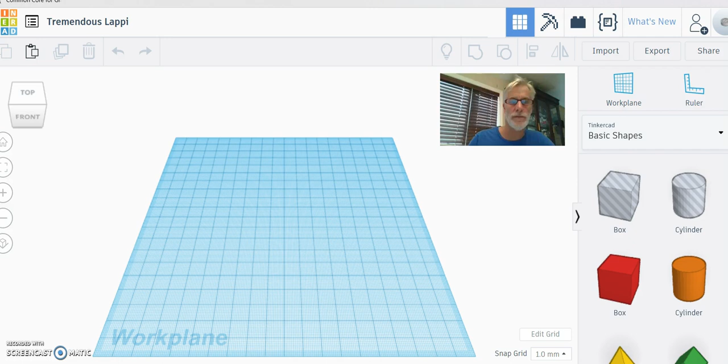Okay, so we're going to get started. As you guys know by now, the first thing I do when making a project in Tinkercad is give it a name that helps me know what it is. So today we're going to do part one of a two-part video designing a medal that you're going to wear around your neck, some sort of medal to represent that we are the Spurgeon Cougars. This part we're all going to do together, and in the second video I'm going to show you how to customize it and make it your own.

So let's name this medal, underscore and your name. I put name because you're going to put your name there. Let's do first name, last initial, that should be fine.

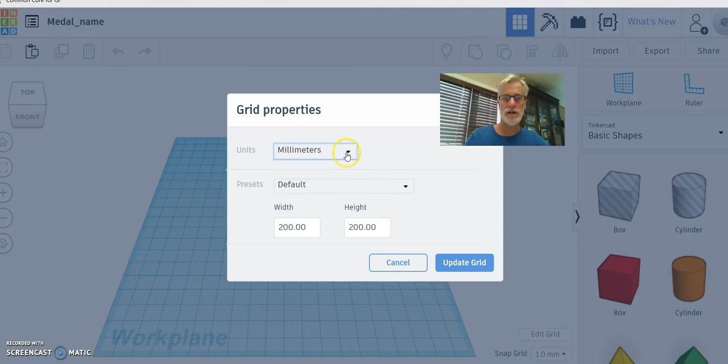Now the next thing I do is come down to edit grid in the lower right-hand corner and click on edit grid. The pop-up window shows our units are being measured in millimeters. We want to work in inches, so we're going to update that grid. The third thing I always do when getting started is drag my ruler to the lower left-hand corner. This way we can keep track of our measurements and know how big the object is that we're designing.

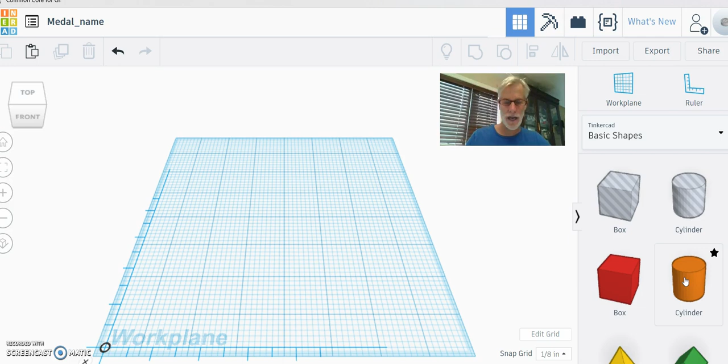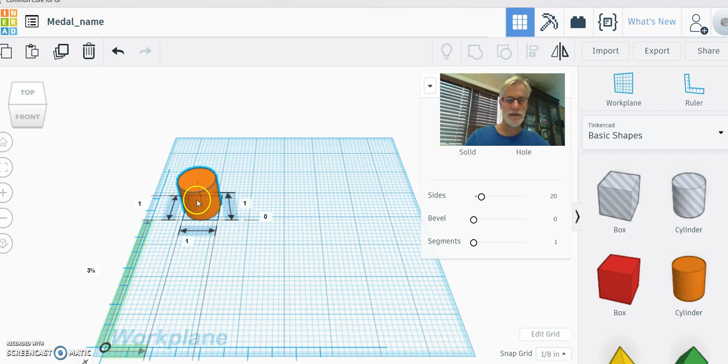Okay, so I'm going to start out with a cylinder. Click and drag on the cylinder in basic shapes. The program should always open up in basic shapes, but if you weren't, you would click here and find basic shapes. All right, let's get this somewhere convenient to work with. All this is just giving me details of how this is designed, we're going to leave that alone right now.

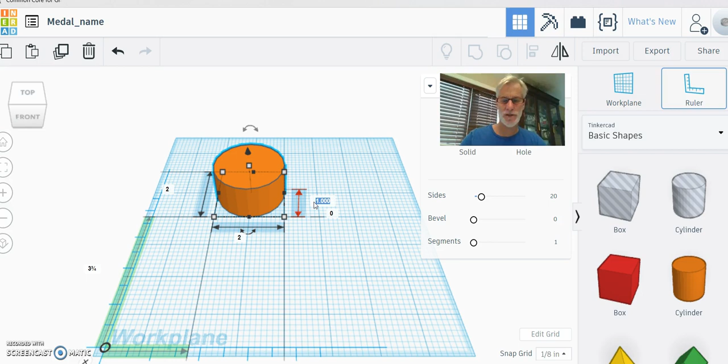It's 1 inch round, I think we want to make it a bit bigger than that. Let's go 2 inches on the x-axis, and now 2 inches on the y-axis. And it's 1 inch tall, that's way too tall, so we're going to make it 1/8 of an inch tall, so that's 0.125. If you did 0.125 times 8, you'd get 1 inch, so it's 1/8 of an inch.

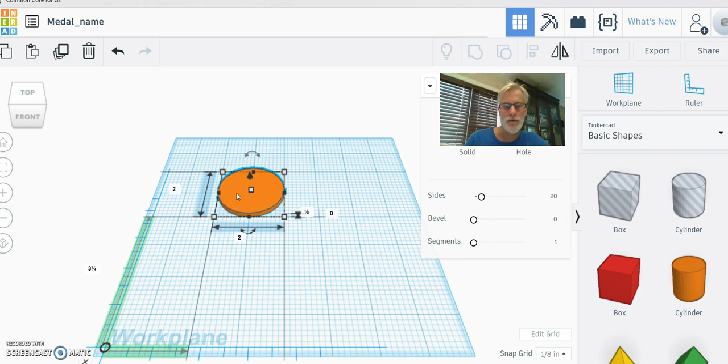See, 1/8 of an inch, all right, now we've got our medallion. Now we need to find a torus shape, and I'm going to choose this one here, that's the curved torus shape.

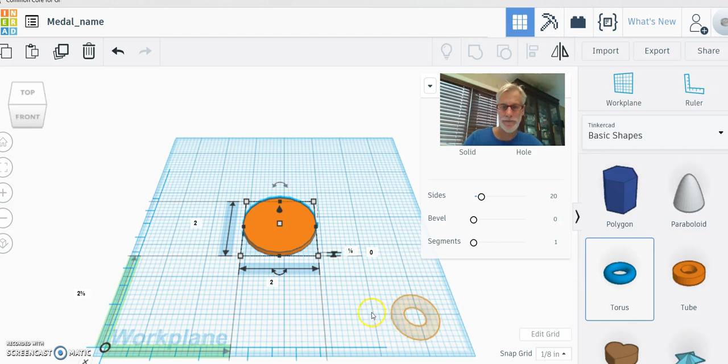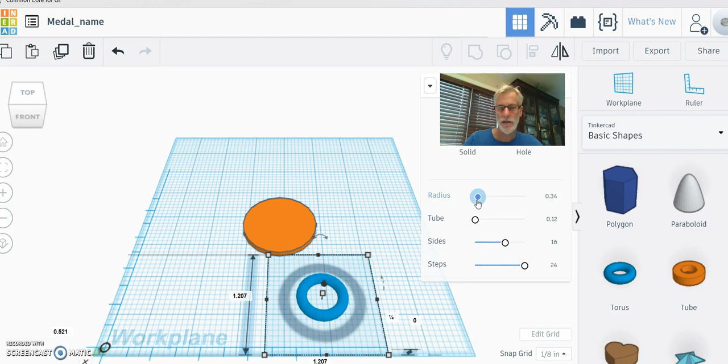Now look, it gives us some interesting choices over here. Let's check these out, we're starting at 0.38 radius, and I'm assuming that means from the center to the outer edge of the torus. Let's just scroll this and see what happens - wow, it gets bigger, it gets smaller. I'm going to make it... you know what, that's pretty good, 0.39 is fine. Or we could just go back to the arrow here and back, and it's back to 0.38 where we started.

Okay, now the tube, 0.12, that's how thick it is from the inside to the outside. So let's see if we can make this tube a little bit thinner, skinnier. Whoa, okay, I want to go about, let's try 0, see if we can get 0.07. Okay.

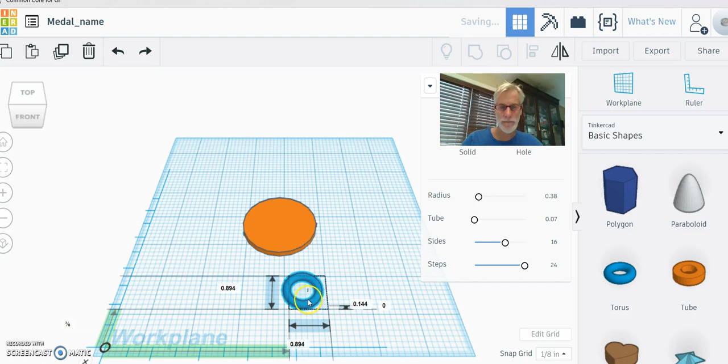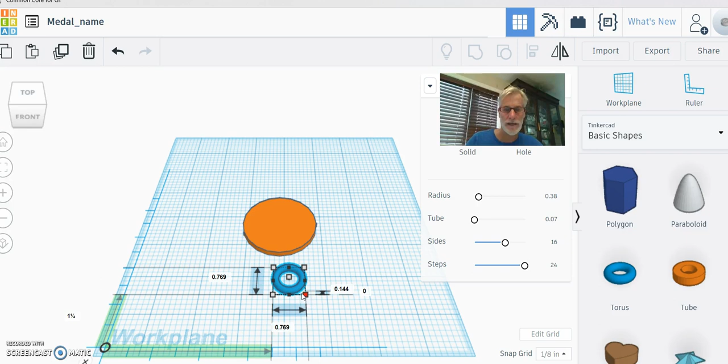Now, oh, my dimensions are big. Yeah, 0.38 is the radius, so, oh, that must be to the inside because our diameter is more than double - our diameter is 0.894. So I want to shrink this down a little bit. I'm just going to use this corner, click and scoot it in till it looks about the right size to me. That looks pretty good. Let's just go 0.5 and 0.5.

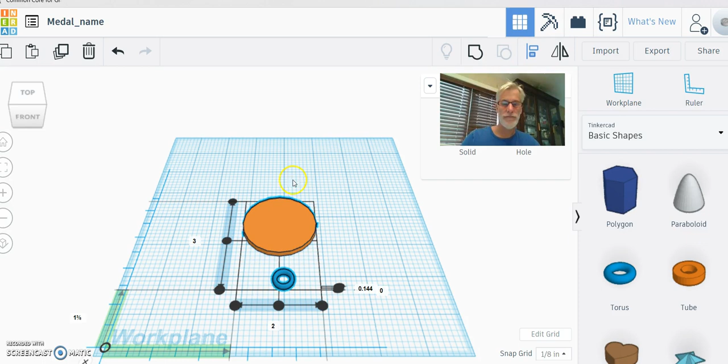Okay, and now let's click and drag over both objects, click on our alignment tool. Now if I center it, it's going to disappear inside of that, I don't want that. Let's try this one here, that brings it right to the edge. Let's center it here.

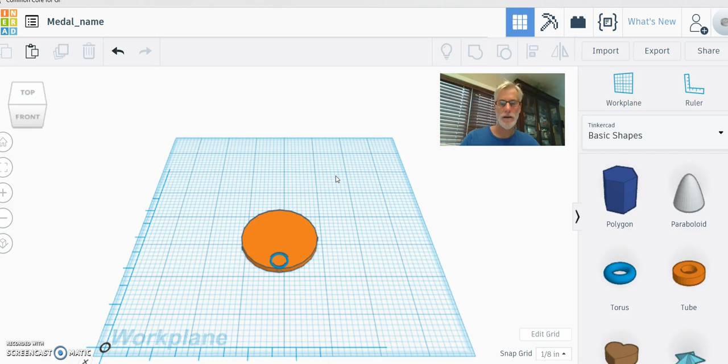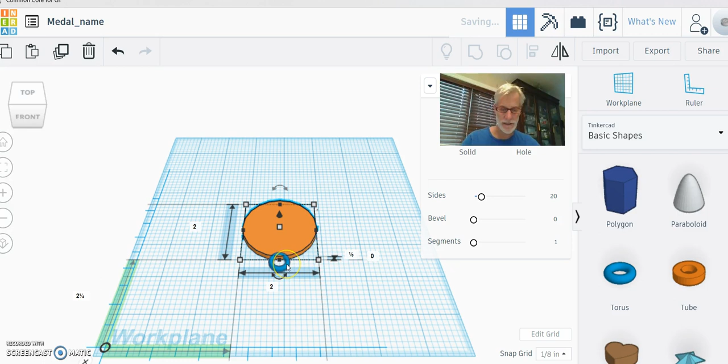And now let's click on the work plane, now select just the brown disk, and I'm going to use my up arrow to move them apart. Now, they're both 1/8 of an inch in thickness. Well, let's see what this thickness is - 1/4, let's make that 0.125. Okay, now they are the same thickness.

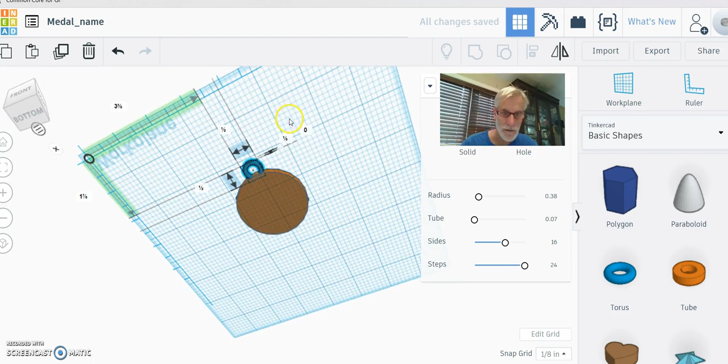Okay, so that little loop for our necklace looks like it's hanging onto that medallion pretty good. The last thing we need to do when we got it the way we want it is drag it here, and we've selected both objects, so we're going to group them. Okay, and I can tell I grouped them because now they're the same color.

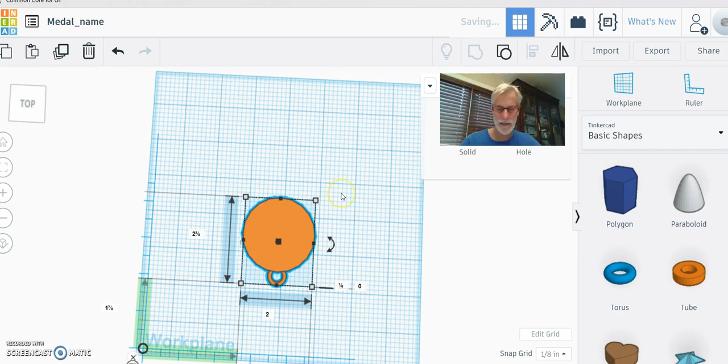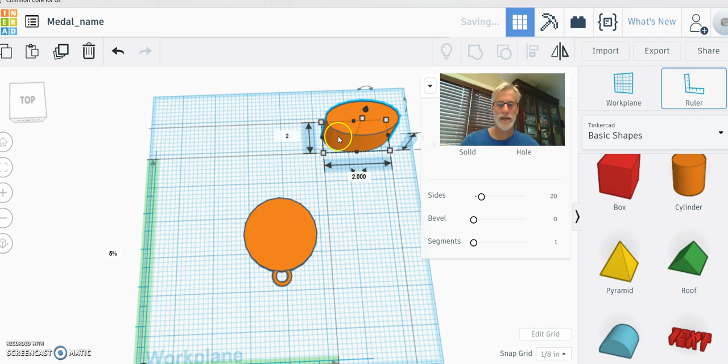Okay, so that's step 1, we're pretty much done. Let me go through that one more time. Grab a cylinder, two inches on the x-axis, 2 inches on the y-axis, the z-axis 0.125, 1/8 of an inch.

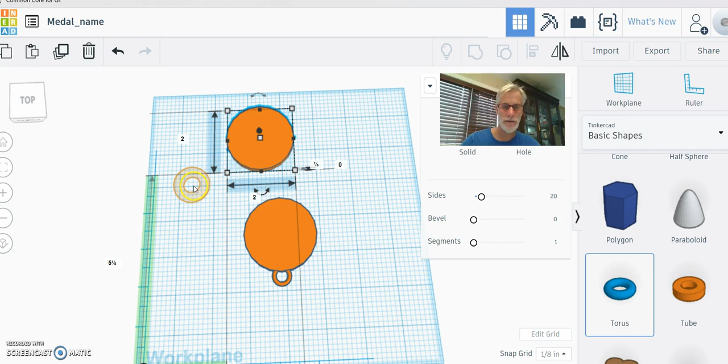Okay, and now I'm going to get that guy again, I'm going to drag him over here. I'm going to make 0.5 on the x-axis, 0.5 on the y-axis, and that 1/4 inch I'm going to change it to 0.125, 1/8 of an inch. Now the tube, I'm going to do a little skinnier, I'm going to do 0.7. And then I'll just drag this guy over and let's select both.

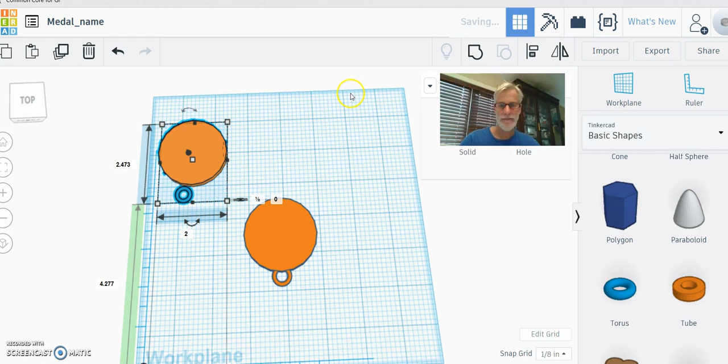Align. I really don't have to align it the other way, what I'm going to do is just move this one over to it like that. Now, remember to click on both and group them.

That's our medal. Now, tomorrow, we'll put an image on top of it that's going to customize it and make it your own. That's all for today.